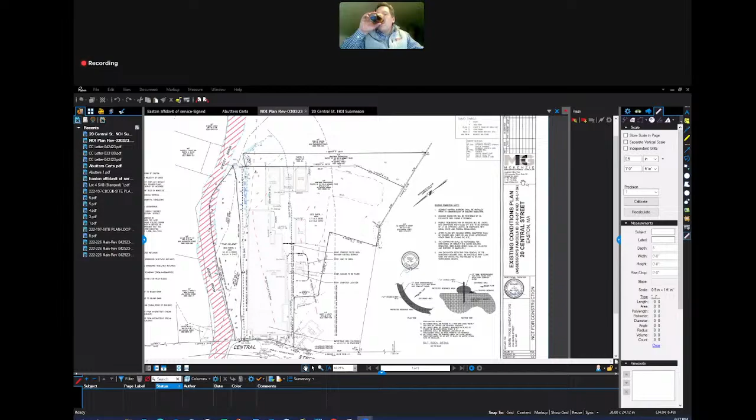So I assume you can all see the screen now. Yes, so this is 20 Central Street. It's a factory that's been there for, I don't know the exact history, but I'm guessing 100-plus years. It has a main building and several outbuildings, some in the back, one right here. The building in question is this small building right here.

It's in an advanced state of disrepair. The roof has started caving in. So for the immediate future, Mr. Vardakostas would like to take this building down and remove it from the site. That would just involve probably an excavator with a thumb that would demolish the building, load it into dumpsters to be hauled off-site and disposed of properly at a proper landfill facility.

There are, I believe Jennifer took some pictures, several 55-gallon drums along here. Chris Vardakostas had someone investigate that, I don't know exactly who, but had someone investigate that. The drums are empty, so there's no pollutants within the drums, so they would be hauled away as well.

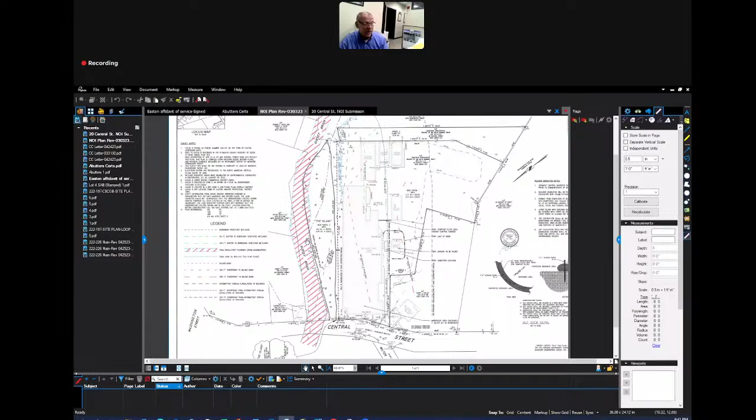So this red hatched area, I tried to match what's shown on the typical FEMA flood map, so that's why this kind of gaudy hatching is along here. But that represents the floodway, I mean the regulatory floodway as shown and taken from FEMA.

And these lines are actually developed from, we downloaded several of these lines. If they're not field located, we develop them from importing them from Mass Mapper, now Mass GIS. So those are directly input. We're on the Mass coordinate system with our survey, so they kind of drop right onto our drawing. So that's the extent of the floodway.

And then we have the canal intermittent stream here. We have zone AE flood elevation of 100. Again, that's based partially on topography, but also taken from Mass Mapper. So that's the limit of that, the zone AE.

Let's see. I guess that's it in terms of that. Okay. The project is not exempt from stormwater management, so we do still need the checklist. Most of it you're going to put NA, but we do still need it.

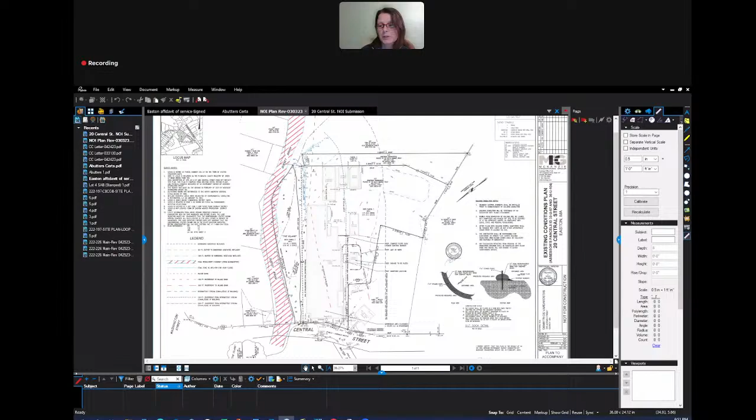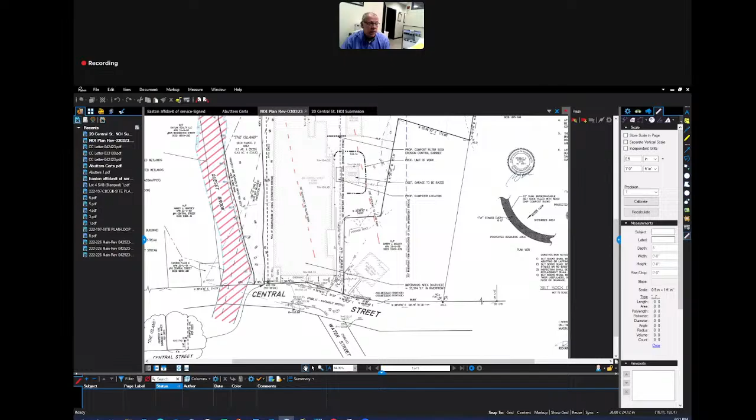So, from my perspective, what's the method of access to this building and the dumpster and everything else? So there's a narrow driveway that comes in off of Central Street, right through here. So I show a dumpster location here, between the building to be torn down and the existing building. So the excavator would set up in here. They would leave a dumpster. Typically, when they demolish a building, I'm sure you've all seen it, they basically take an excavator and crunch the building down and get it into small pieces so it fits into the dumpster easier, more compactly.

So they would stage a dumpster here and load from an excavator into the dumpster, and then it would be hauled away. And I'm anticipating this might take two dumpsters. So they would haul one away and probably leave an empty one at the same time, and then fill that and haul it away. So it could all take place in a relatively small area. I would guess that a truck would pull in and then back into here and leave the dumpster, and then do a similar routine to make the exchange of the dumpsters. So it could all be a pretty confined amount of work with respect to this razing of the building.

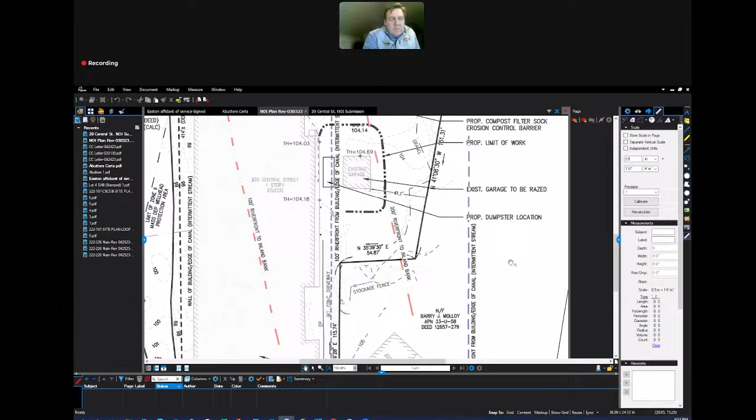So you indicated that Mr. Vardakostas was a relatively new owner of this property, about a year? Yes. So from that perspective, what are the plans for Mr. Vardakostas for this particular piece of property? I don't know that they have fully appraised what they're going to do with it. In speaking with Chris, they mentioned maybe some kind of self-storage facility or something along those lines. But the buildings need some fairly substantial work, so that's probably down the line a little bit. I'll just mention that it's a historic building, so you do need to meet with the historical commission on that. Yeah, I'll advise Chris of that.

So, Jennifer, as a point of information, this particular razing of this building has already been approved by the historical commission. Is that correct? I don't think the garage is part of that. The large building is part of historical. If I could, the building is, as I say, in an advanced state of disrepair. I don't know if you have pictures you can share, Jennifer, but the middle of the roof line looks like a saddle almost. It has collapsed or half collapsed at this point. So there's really no value to the building at this point, I don't think. Yep, I do have those pictures. They're in our packet, so you should have them already. Any other questions from the commission?

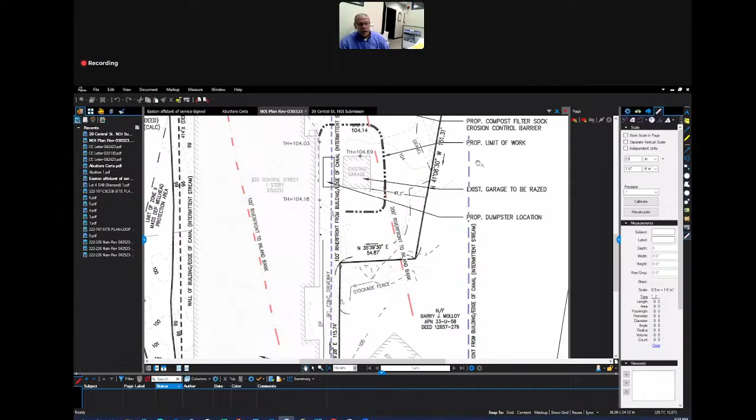I certainly understand the position of the commission. So we could propose cleanup of the material, certainly the debris, the roofing materials or whatever else is around the building, especially around the back here. I think that's maybe where you saw all that debris, Jennifer. I'm not sure, but we could propose that cleanup.

I don't know how you as the commission would like to proceed with that. Should that be part of this filing? Should we make a separate filing? So here's the conundrum that we have as commission members, is that if we make it part of this filing or any other filing, it leaves it up to the landowner to do the project.

And unless we go straight to enforcement, we lose some of the control over the time frame and the definitiveness of actually getting the project done. Mm-hmm. Right? Because a permit is actually that. It's a permit to do work. It's not a mandate to do it.

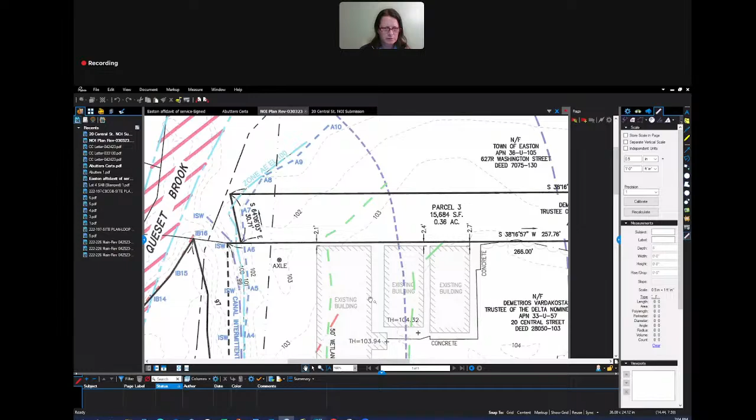Do we need additional sedimentation control here, Jennifer, if we allow that? Sorry, Ben? Oh, no, I was just saying out loud for cleanup. Yeah, that's what I meant. Yeah. It's possible that they wouldn't. There is some vegetation in that area behind the building and between like the wetland A series. There is some existing vegetation. It probably would be a whole lot easier to do being on site.

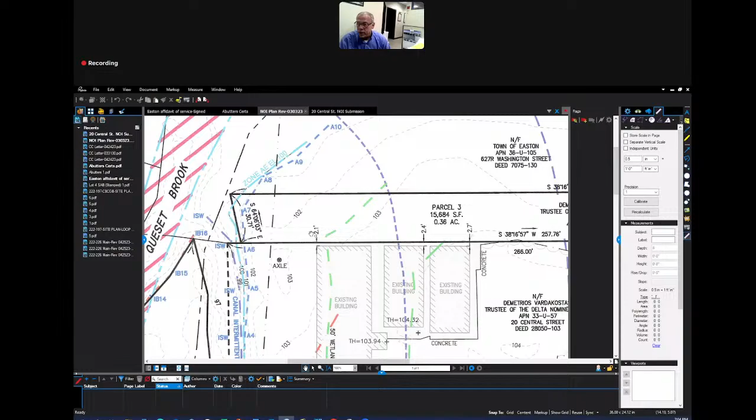And, you know, Al, you may want time to discuss this with your client first. And maybe it's worth doing a site inspection with the three of us to try to really get a handle on it. I think that would be a fantastic idea, because I was gonna ask the question procedurally. We don't wanna go in there and make a bigger mess cleaning it up by running equipment back and forth and all that, so I think a site visit would be extremely valuable.

Okay. 'Cause we have some information that we're waiting for in the meantime, so it would make sense to continue and do the site inspection and pull the rest of the information together, if that works for you and your client. So I think just as a little bit of a straw poll here, I just want to make sure we agree so we can give Jennifer the proper guidance so that when she's out on a site visit with them, she's getting the information she needs in order to get this to a decision, right?

And so I think that we're suggesting that let's try and get the debris off the site the best we possibly can. There may be parts of it that may have to be included in a restoration portion of this, but if the debris can get removed expeditiously and without further damaging the resource area, I think we should probably try and get that done. And so I think our idea would be to include that in this permitting process, give them permission to do that. And Jennifer can decide what kind of sedimentation control might be necessary.

And then we can wrap this permit up as one, and then we can start talking about getting the other violation addressed. That's the way I think we approach this. Jennifer, does that direction seem to be okay for you? Yep, I think that makes sense. Anybody else? We're good. We got a thumbs up, a nod. Yep. We've got two nods and two thumbs up. So, okay. So I think that's the way we go.

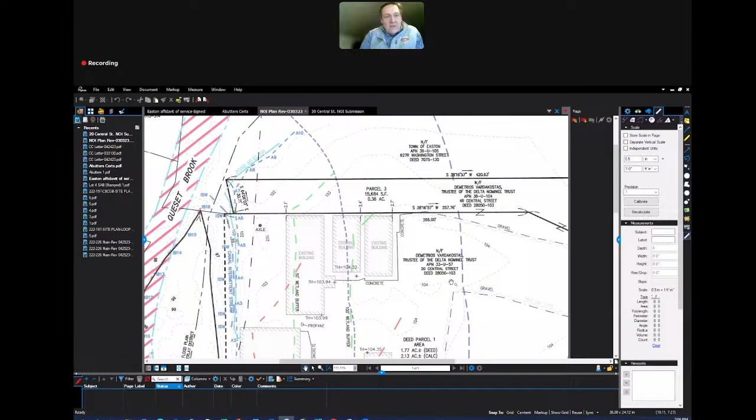We'll continue this until May 8th. Okay. Just before I do that, any public comment for 20 Central Street? You need to raise your hand or put something in the chat or anything along those lines.

Okay, so seeing none, let's continue this to May 8th. And in the meantime, I think Mr. Loomis has some stormwater checklists and an updated O&M plan, and then we've got to get some sort of agreement on an illicit discharge statement of some sort. And then we'll do a site visit with Jennifer along with Mr. Vardakostas and see if we can't figure out in the field what can and can't be done.

Okay? Thank you very much, Jennifer. I'll get in touch with you tomorrow. So that was a motion. Sorry. Motion to continue to May 8th. Carol, second. Roll call vote. Benson, aye. Carol, aye. Crossman, aye. Caulfield's aye. Okay. Mr. Loomis, you can arrange with Jennifer on setting something up.

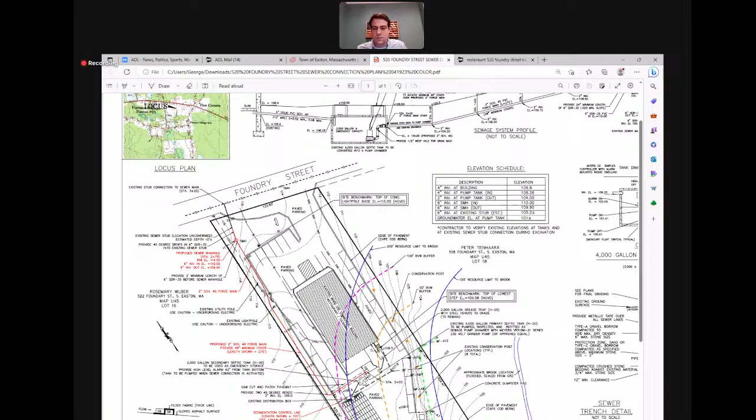Jennifer, any comments on this aspect? Just a couple things. All along most of the wetland boundary, there are piles of compost and trash that are partially in the wetland and some at the edge of the wetland that all need to be cleaned up. And a broken pipe that's discharging from the building into the wetland, near WFA 11 and 10. Yeah, right around it. So a couple items to address.

Yeah, and that's from the downspouts from the roof runoff, so it's not some mystery pipe, just so the commission knows. It's relatively clean roof runoff. And again, I apologize to Jen already. My plan was to submit the request for certificate of compliance and the request for determination of applicability at the same time. My 77-year-old, really good general manager got everything submitted for the request for certificate of compliance before I even knew it had happened. So she sent in a very generic letter saying that everything was in compliance, but I meant to add some language to that.

And because Mr. Levine and his partners were not aware of any of this, we wanted to start the conversation and figure out what we need to do to close out the old project. The only other thing to keep in consideration is the system is in failure, so we know we have to take care of some housekeeping items associated with the previous application, but we would like to move forward with the sewer connection as quickly as possible. I do have my proposed corrective actions that I sent to Jen. Whether you want us to hammer that out between Jen and myself, I'm more than happy to go over it with the commission when you deem appropriate.

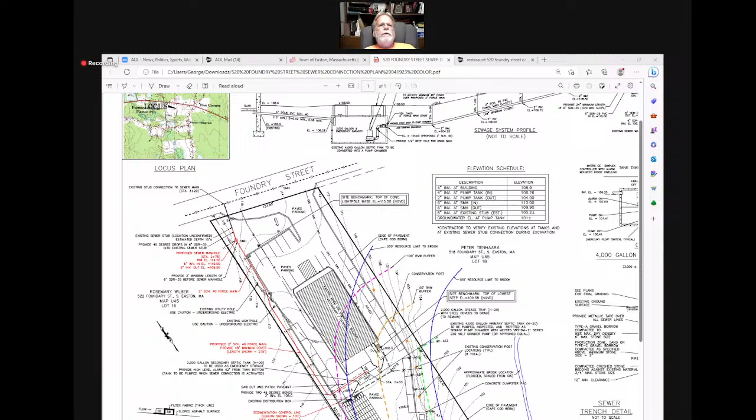Roy, do you have thoughts? My inclination is to deal with both now, as opposed to having everybody circle back later in the agenda, even though we posted it as two. I think you could make the decision to move that one forward. Yeah, so I think we probably deal with both of them right now. Okay, if you want, I wanted to bring up my letter. Let's see, where are we here?

Mr. Chair, can I have a point of information? Absolutely. Jennifer, can you clarify: do we have to deal with the certificate of compliance before we issue this permit, or can we have two permits open at the same time? DEP has a policy where you don't have two permits open at the same time. It does happen. It's a policy. But ultimately, Mr. Levine obviously was not very happy to find out he had all these outstanding obligations. You may or may not know, but he also owns McGuire's Bar and Grill, and this La Familia restaurant, also the strip mall at McGuire's, and pieces of property across the street from it.

So he's a local businessman, and he really wants to try to resolve everything, aggressively stay on top of this. And so again, he didn't know anything about any of this until about a month ago, so.

George, can I jump in? Sure. You guys hear me? Yeah. This is Neil Levine. I own McGuire's, for those that don't know. My partners own the plaza across the street. I just want to let you know our intentions. We purchased this property in 2014 at a foreclosure auction. We weren't aware of the order of conditions that were in place.

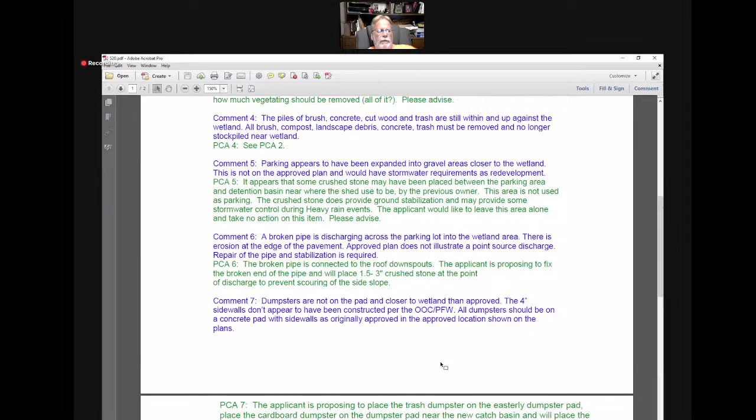So right now, the dumpsters are all kind of clustered together on the left-hand side. If you go to the parking lot from the street, there's a cardboard dumpster, a regular dumpster, and a grease dumpster—just so the commission understands how things are laid out right now. The applicant is proposing to place the trash dumpster on the easterly dumpster pad, place the cardboard dumpster on the dumpster pad near the new catch basin, and place the grease dumpster up by the rear of the building.

The applicant is requesting that the 4-inch sidewall requirement be waived. The sidewalls will trap water, creating an insect breeding area. To be honest with you, it was 15 years ago when we did this.

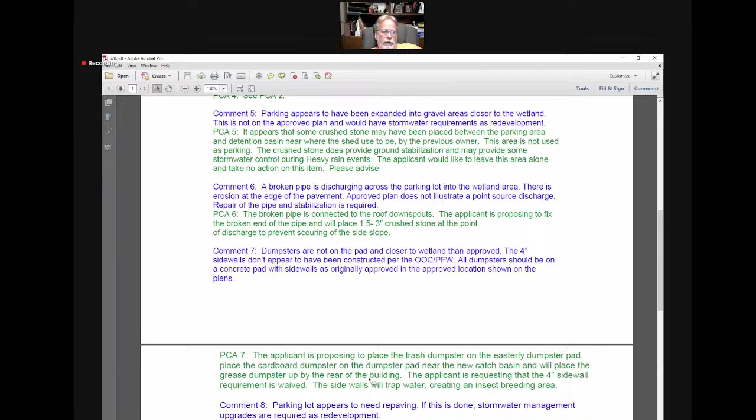Typically, when we do dumpster pad designs today—when I do them now—we don't do any type of curbing around them. It would be cumbersome and difficult to put in the curbing, and it wouldn't really serve any solid purpose. So my opinion is if we can put them on the two concrete dumpster pads that are there—because right now they're kind of off the edge of the parking lot, sitting on the ground—put the dumpster pads basically where they're supposed to be, and put the grease dumpster right behind the building, then everything will be on a solid surface, as the original site plan had intended. But again, we would like to seek relief on that 4-inch sidewall. I don't really see any real benefit to that.

Comment 8: the parking lot appears to need repaving. If this is done, stormwater management upgrades are required as redevelopment. As of right now, they have no plans to do any paving, but obviously this puts us on notice that if any repaving is done, an application is required.

And then just in closing, please let Mr. Levine and me know if these proposed corrective actions are acceptable. He is committed to rectifying these items to the satisfaction of the commission. Please let me know what your thoughts are, and thank you for your guidance in this matter.

So that's it. So we definitely have some work to do. Yeah. But if we could just get a little bit of clarification on some of these things, on exactly what the expectations of the stormwater handbook, Jen and the commission might be. If the side slopes and the bottom are supposed to be mowed, then go in and correct that. Yeah, but which I don't think is the case with this.

It's mostly, so. There wouldn't be trees growing in it, so. Yeah, they're actually kind of growing over it. They're not growing in it. It's all thickly wooded, and they're kind of growing over it. So honestly, if you can actually walk around the trees and get into the stormwater basin, and the bottom of it is actually, there's no debris or anything on the bottom.

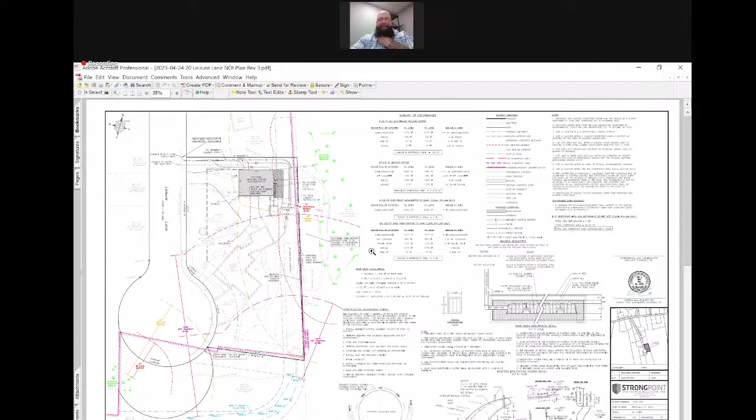Okay, so this goes along with the letter that I submitted today. So I'm going to walk through this letter and the plan at the same time and show you guys kind of what we've done here. First and foremost, we had this issue with an encroachment into the abutting property at the Wilbur's property that is also natural heritage habitat. We talked about ways that we could rectify that. We talked about getting the fire pit out of that area that's over the property line, and we had proposed conservation markers in the location.

The commission, I don't think, was satisfied with the conservation markers, so we beefed it up and we're proposing to put a split rail fence on right now with conservation markers on the fence. That's going to prevent any future encroachment into that area. And like we talked about last time, since this is an area that we don't own and have control over, we can't really do a restoration or a mitigation planting on it, but we can certainly leave it alone and let it repopulate naturally, which we feel is a betterment.

Now, that's a 4,400 square foot area, as opposed to the size of the garage that we're proposing, which is a 1,344 square foot area. So roughly that comes out to a little better than 3 times the area that we're proposing. I'm just breezing through my letter here. Ms. Carlino had made a note about there being a mulch pile and concrete in the wetland and buffer area. We've agreed to take those out.

Now, more importantly than all of that stuff, I'm going to zoom in on the building. The building in the previous form was 44 feet long and was situated in the buffer more. There was 93 square feet of the building in the 50-foot no disturb buffer. It was suggested to us that we try to shift this building forward at least 6 feet. So what we've done is we've shaved 2 feet off the back of the building and we brought the building 4 feet forward, okay? That leaves 16 square feet of the building in the 50-foot no-touch buffer.

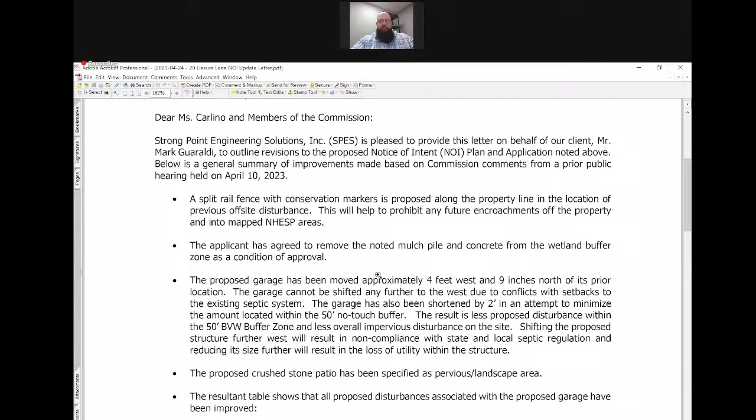We have also clarified that the crushed stone patio is in fact pervious. We had some discussion about that at the last meeting, but really the tale of the tape for this whole thing comes down to the table that's in the letter. I'd like to highlight that briefly. So this table shows improvements that we've made from the prior, okay? We have 242 additional landscape area within the buffer zone, so that's less impervious. We have 16 square feet of impervious, so we have 77 square feet less roof in the buffer zone.

Okay, in the 50 to 100, we have 637 square feet more landscaping than what was proposed before. That's lawn and crushed stone area. Big number is the pavement. We have almost 300 feet less pavement than what is in the existing condition on the site now. So we're reducing pavement from what exists today, which can be said to be a betterment in and of itself in the buffer zone.

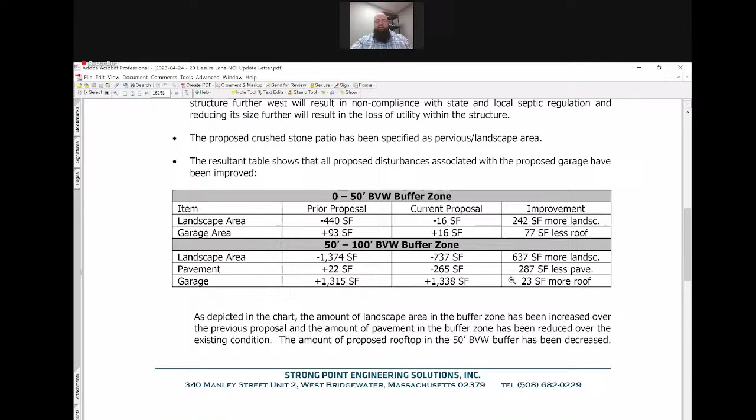Okay? And as a trade-off for all of that, we're only proposing 23 square feet more rooftop in the outer 50 to 100-foot buffer. Now, what's important to note here, I know we talked about it before, I'm going to go back to the plan for a second.

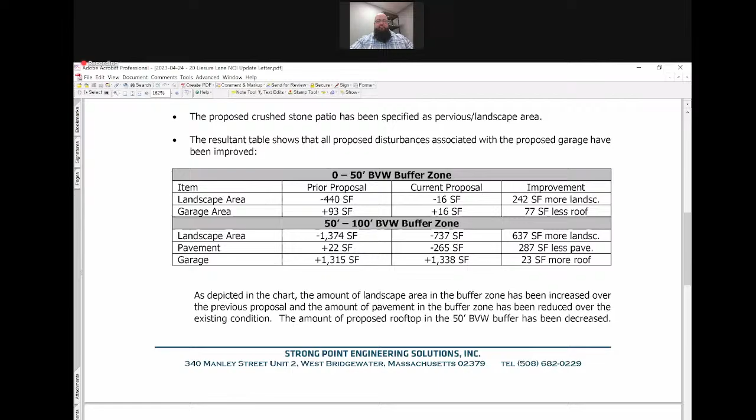In addition to all of that, we have completely wiped out the need for any resource area alteration to do with the riverfront area. That's gone now. Okay? We're also proposing a rooftop infiltration system. That's going to be a betterment in that it's going to take the clean rooftop runoff and get it into the ground directly, where there is otherwise not a mechanism on site that does that. We're relying completely on surface infiltration to get water to the ground. This is going to ensure that it gets injected directly into the ground. Okay, so all those are better.

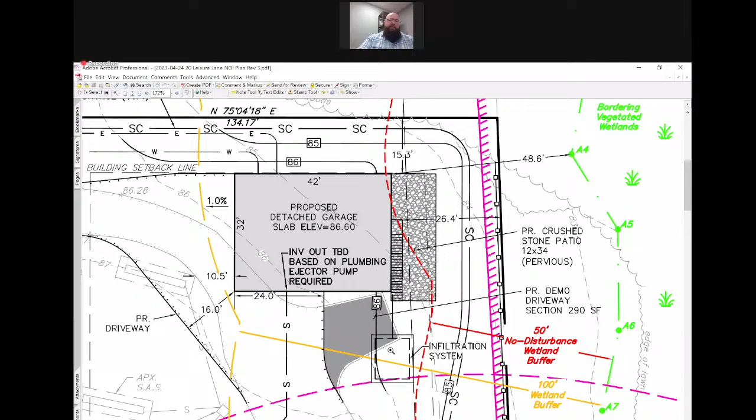In addition to all of that, the last thing in our letter: it was suggested to us by staff that there may be some funds that could be contributed to do some work in the town. What was identified is that there is a need to refurbish, repair, or replace some of the conservation area signage, and there may be a need to provide material to improve the community gardens. So my client is proposing to make a donation of funds to either or both of those things, however the commission chooses to split it up, at your discretion, as an additional public benefit to help fund those items. He's proposing a donation in the amount of $2,500.

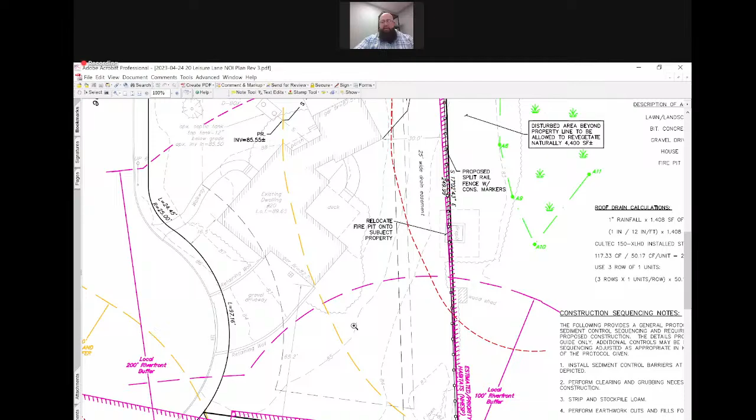So I think it's important to note that the credo is avoid, minimize, and mitigate. We've avoided by getting all disturbances out of the 100-foot riverfront area in the back of the house where we originally wanted this. That put us in the 50-foot no disturb. We've minimized by shrinking the building, and what's keeping it from moving farther out is Title V. That's what allows us to do so.

We've reduced the amount of impervious surface on the site with regard to pavement. We're allowing the remainder of the disturbed area to repopulate. We're putting up a fence to make sure we're not going into that area again. We're going to put up the conservation markers, and a donation for off-site betterments on top of all of that. So that is part of our mitigation strategy. I'm hopeful that the commission will agree that we've made significant improvement and hopefully hit the mark on this one. Mr. Chairman, I'm glad to turn it over to you, and I'll go your direction. Thank you.

Jennifer, any update for us? The only other thing, in addition to what Eric has already said, was they revised the waiver request. Which we did. Any comments from the commission?

I'd like to know, last time we gave the applicant, Mr. Diaz, direction to move the building out of the no disturb zone. I think that he is now 1.4 feet in the no disturb zone, and provided an explanation as to why. I certainly think he's probably done as good an explanation as he possibly can. I just wanted to take the temperature of the commission to see if this was an acceptable location. There was some discussion previously that it couldn't move out far enough because it would block the house or some other thing, and I think we discounted that. But I think there's a proper explanation on the table here to have it inside the no disturb zone by 1.4 feet. So I don't know. Anybody else?

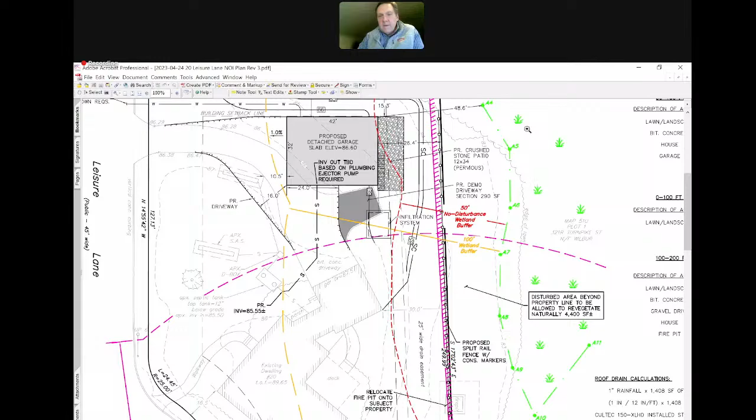Yes. So before I go to public comment, I just want to make sure that if there is public comment on this particular project, that we stay focused on the actual bylaw resource areas as opposed to a general positive impact of the project. So any public comment for 20 Leisure Lane? Mr. Wilbur, I'll recognize Mr. Wilbur, see if we can. Should be here in a second.

So Mr. Wilbur, you can unmute yourself and turn on your video, hopefully. There we go. Okay. Mr. Wilbur, can you just identify yourself for the record? Is there a chance you could turn on your video too? This is a new computer. It's not... Okay. So just identify yourself for the record and we'll take your comments. Edward Wilbur. Your address, Mr. Wilbur? 351 Purchase Street. Thank you.

The revised plans, the only thing they should do is remove the woodshed that he has on my property and the fire pit. I think you agreed to do that tonight, yes. Not the woodshed, just the fire pit. I would say that he's moving both the woodshed and the fire pit. He's not being allowed to leave anything on it. Okay, thank you. I appreciate you asking for the clarification. Yes. The rail fence is a good deal. And that's about it. Appreciate it, Mr. Wilbur. I appreciate you hanging in and coming back to us again tonight. So, thank you. Take care.